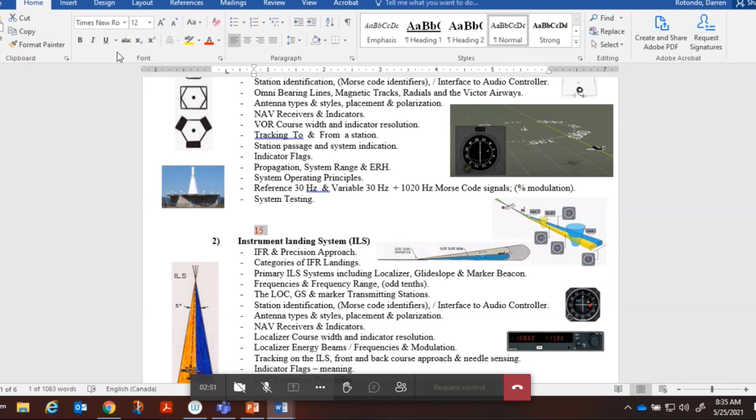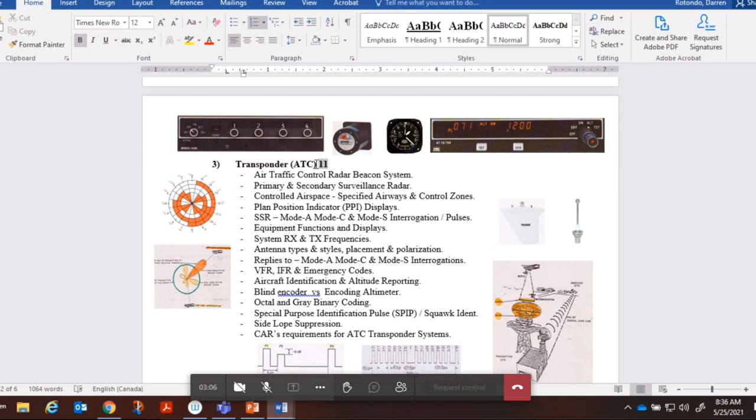Okay, moving to part 2, instrument landing system. You're going to see 15 questions on the instrument landing system. For part 3, transponder, we're going to put 11 questions on transponder. And DME, also 11 questions on DME.

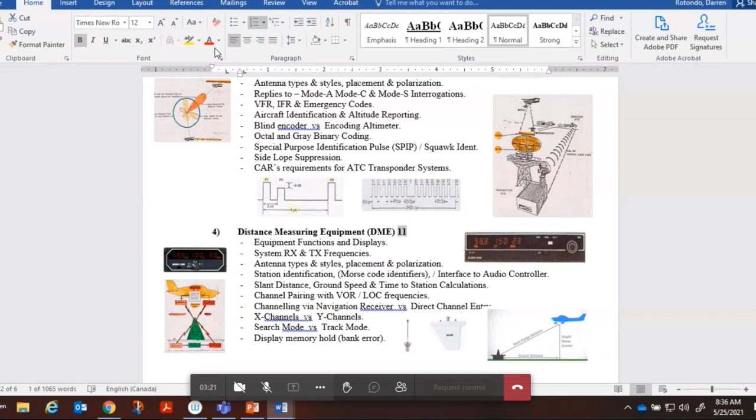And TCAS, there's going to be 7 questions on TCAS. GPS, 3 questions on GPS. RADALT, 7 questions on radar altimeter. Autopilot and automatic flight control systems, that also includes flight management systems, flight directors. There's going to be 16 questions on that topic.

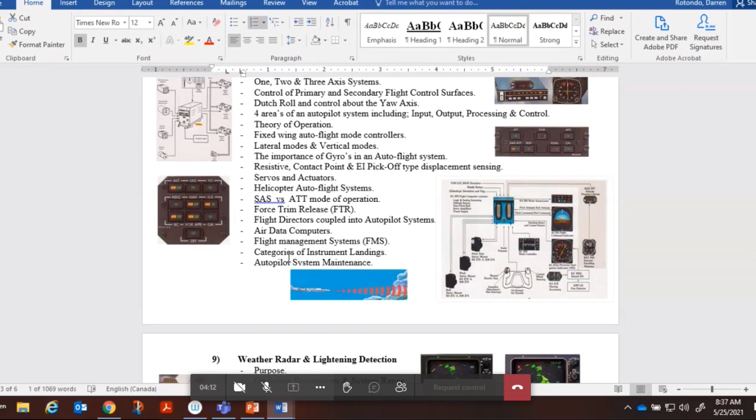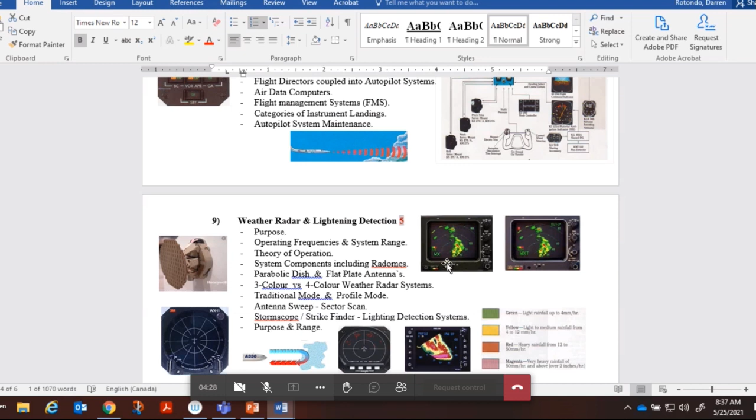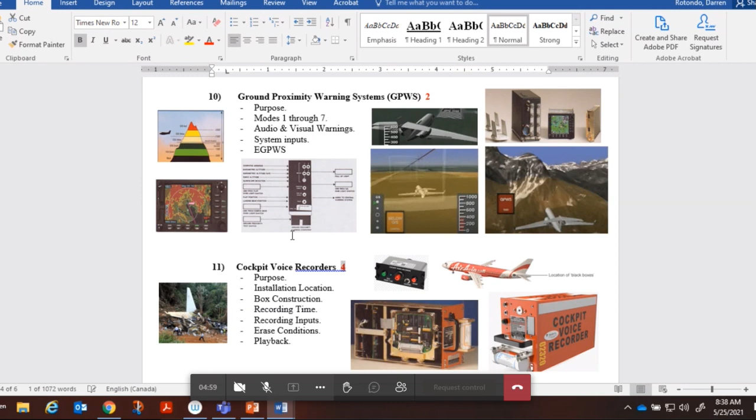Weather radar, there's going to be 5 questions on weather radar, which also includes lightning detection, so Stormscope, Strikefinder, and ground proximity warning system. There's going to be 2 questions on that. And cockpit voice recorders, 4 questions. Flight data recorders, 2 questions.

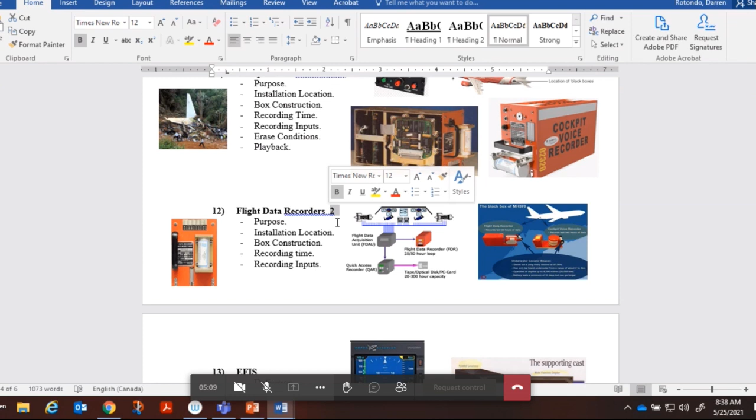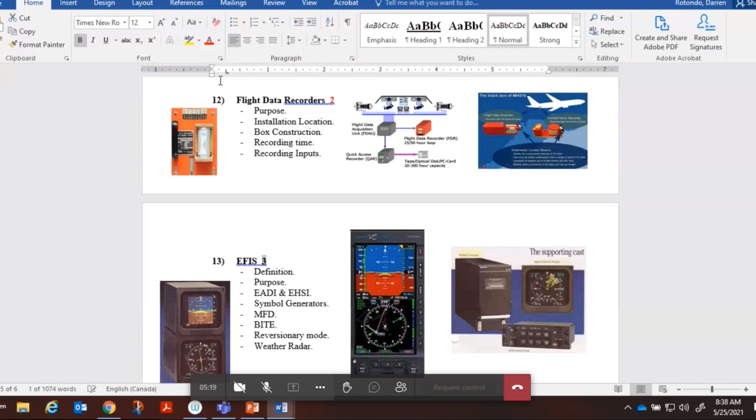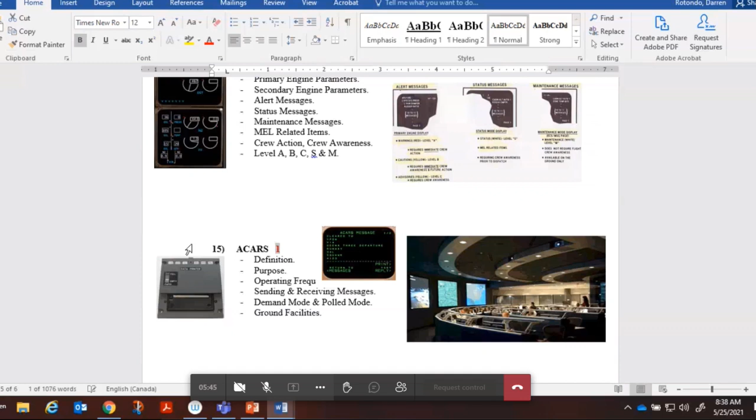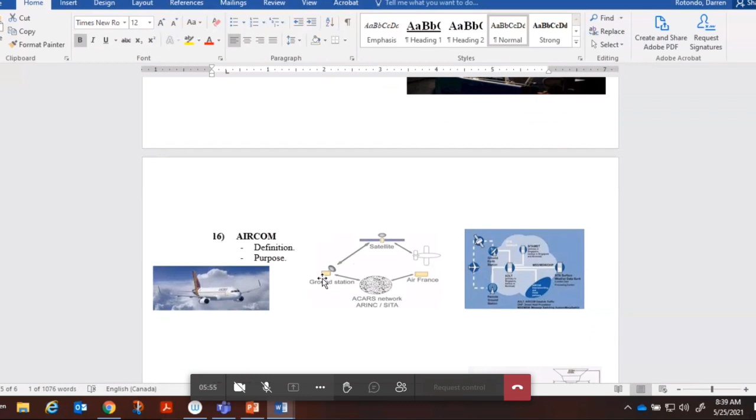Electronic flight instrumentation systems, or EFIS, 3 questions on those. And 1 for good luck on ECAM and EICAS. Then ACARS, a question on ACARS as well. The ACARS question covers AIRCOM. It's the same system, one's European. Selective calling, SELCAL. We'll add a question on SELCAL. And a question on satellite communication right there.

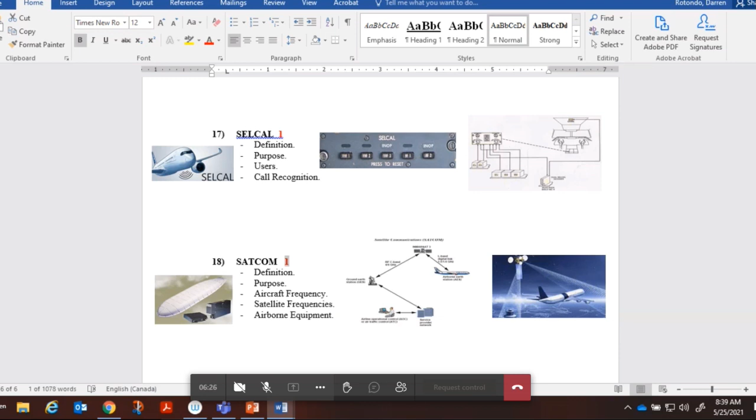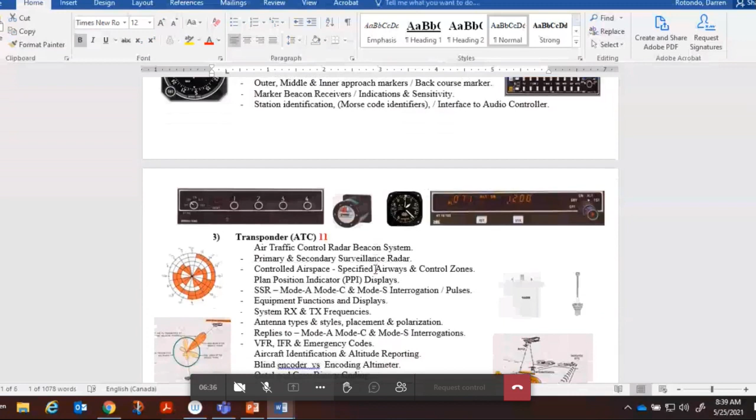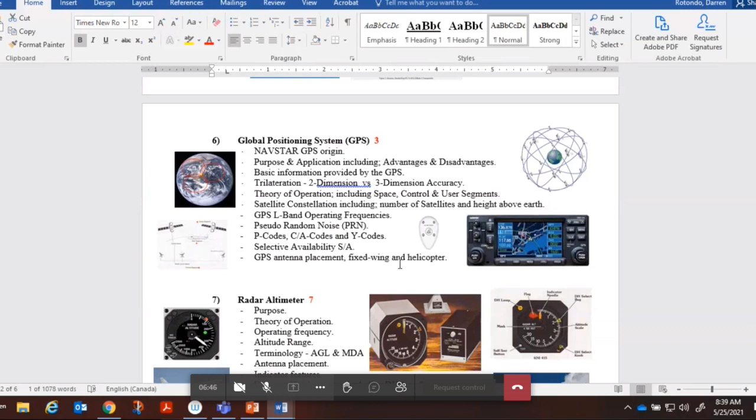So the grand tally, if you add everything up, you're looking at 100 multiple guess questions for your learning enjoyment. Okay, so just to recap, let's go back to the beginning for those people just coming in the door. VOR, 10 questions. ILS, 15 questions. Transponder, 11 questions. DME, also 11 questions. TCAS, 7 questions. GPS, 3 questions. Radar altimeter, 7 questions. Autopilot, which also includes automatic flight control systems, flight directors, and flight management, 16 questions.

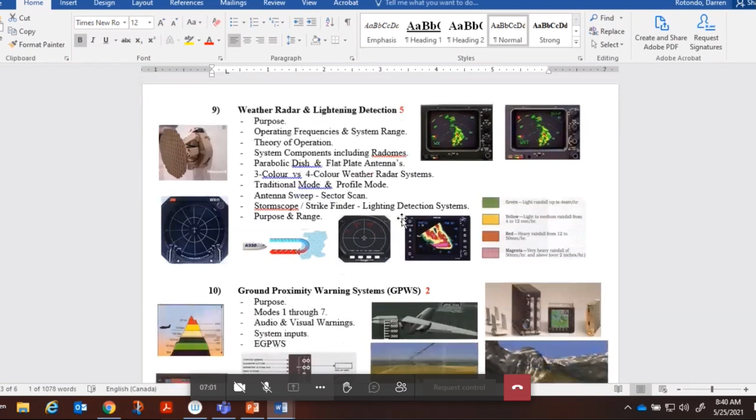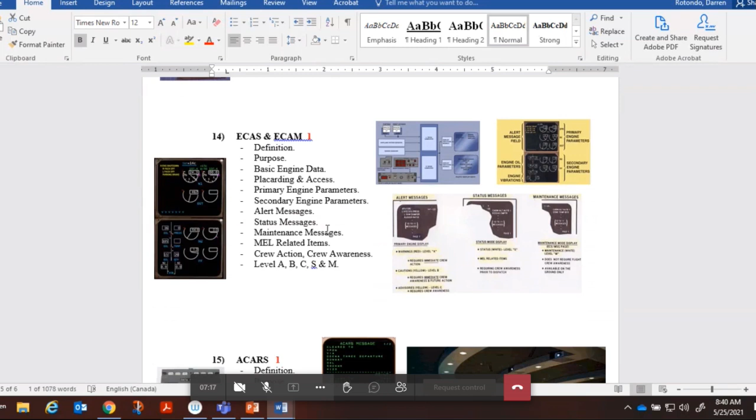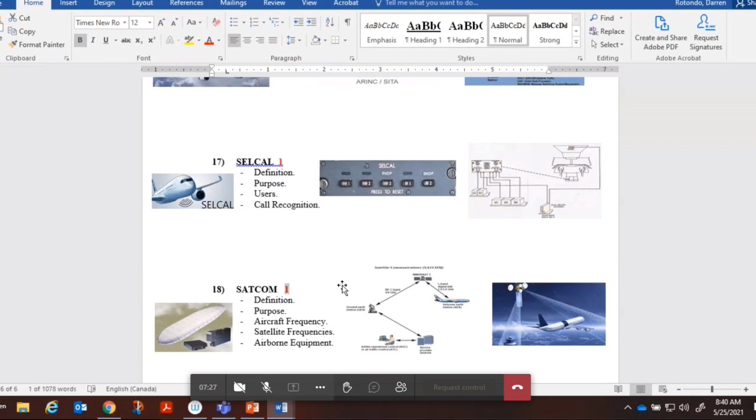Weather radar, including lightning detection, 5 questions. Ground proximity warning systems, 2 questions. Cockpit voice recorders, 4 questions. Flight data recorders, 2 questions. EFIS, electronic flight instrumentation systems, 3 questions. EICAS and ECAM, 1 question. ACARS, which also covers AIRCOM, 1 question. Selective calling, SELCAL, 1 question. Satellite communication, SATCOM, 1 question. 100 questions total. Okay.

Okay, that's great. Okay, moving right along. I want to see.

Okay, so let's get started. Do a little bit of a review here. A little bit of a review. Okay. So, Section 1. Anyone from Section 1. You should be able to tell me in this radio stack what the top unit is. Let's start with Alexander in Section 1. What is that?

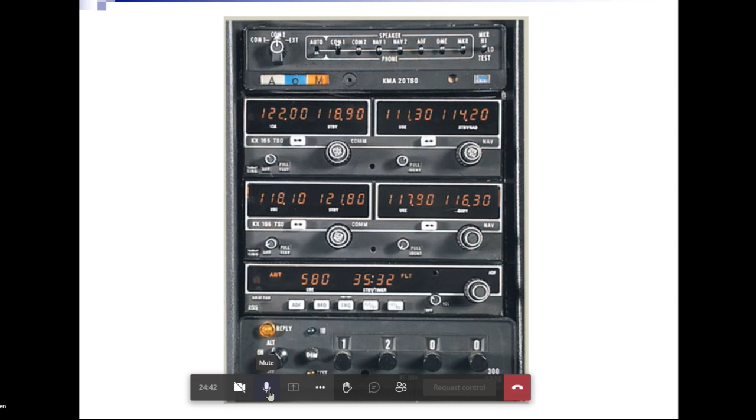Okay, who's Bryce? Where's Bryce Cameron? Is he around? Yeah, I'm here. Yeah, what do you got there? What's that last unit? Oh, I'm here with Alex. I'm not exactly sure. You're what? You're at church. That's cool. No. Charlie, clearly, help him out. Let's see. Let's let them see clearly now.

The rain is falling. The transponder. That's transponder. How'd you know it was transponder? Lucky guess. No, it's more than a lucky guess. Hey, what mode is it in? What mode is that transponder in? Look at the mode selector. Altitude mode. So in altitude mode, what does it deliver to air traffic control? Just altitude?

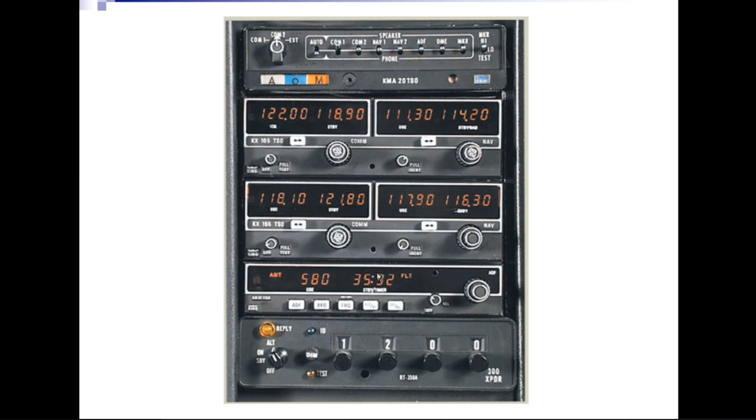Yeah, when they tell you to squawk a number and then hit the ident, that ident will illuminate for a minimum of how many seconds? 20. And it'll make a proof positive ID on their plan position indicator scope that you are who they think you are. So that's good. Nothing more there. Switch to the next one.

So what are we looking at here? Section 6. Andrew Ewing. What is this thing? What is this setup? Nice presentation too. Look, it's got the first frequency of whatever this thing is and the last frequency of whatever it is. Okay. Andrew Hannes. What is that? No? Dean Cove.

Nav receiver. That's the which? Nav receiver? Yeah, I like it. Good. It's definitely a nav receiver. There's the word nav. First frequency 108.00. Last frequency 117.95, 50 kilohertz channel spacing, 200 channels, 160 VOR, 40 ILS localizer, and life is good.

So when it comes to VOR, the V stands for the frequency range on which it operates, so it's very high frequency. The O is omnidirectional. The R is range. And VOR was made available to the civilian market at the end of the Second World War, 1945. And why did it quickly become the preferred navigational source over ADF? What was the problem with ADF? Because ADF wasn't necessarily that bad.

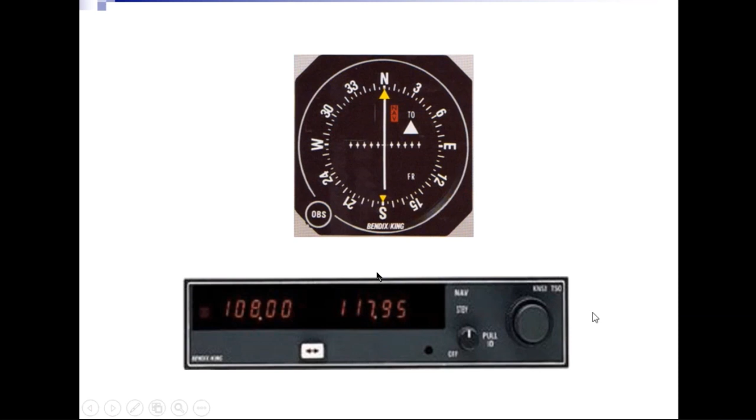Right now, the active frequency is the first frequency, 108. The standby frequency is 117.95. The volume is about halfway up. If I wanted to hear anything, I'd have to select nav through the audio controller. And if I wanted to hear the Morse code, it says pull for ident. I'd have to pull and break the squelch so I could hear it.

Okay, looking at what we have there, we have three symbols. Which one of those is actually a VOR symbol? Is it the top one, the middle one, or the bottom one? Top one. Top one is a VOR symbol. Okay, so what's that make the middle one? And that's what North Bay actually has. Middle one. VOR DME, isn't it? Yeah, so it's a VOR station co-located with a DME station. It's kind of like a Wendy's and Tim Hortons co-located to each other, or Harvey's Swiss Chalet.

And what's the last scary looking one? VORTAC. Yeah, VORTAC. What's the TAC mean? Tactical. TACAN, Tactical Air Navigation, the military gave us all this stuff. So a VORTAC is a civilian VOR station co-located with a military TACAN station. It doesn't matter. Any of those stations, whether it's just VOR, VOR DME, VORTAC, or even TACAN, you can pick up usable VOR signals from any of those stations.

How are VOR stations identified? I think I talked about this. North Bay is YYB, emanating from the station on 1020 hertz audio. And the range of this system is, now you've got to get nice and high. The higher you go, because it is a VHF system, the better off you're going to be. If you're nice and high, let's say 30,000 feet, you're going to get about 200 nautical miles out of this system. So you can track towards or away from an en route VOR station or towards an airport. Okay.

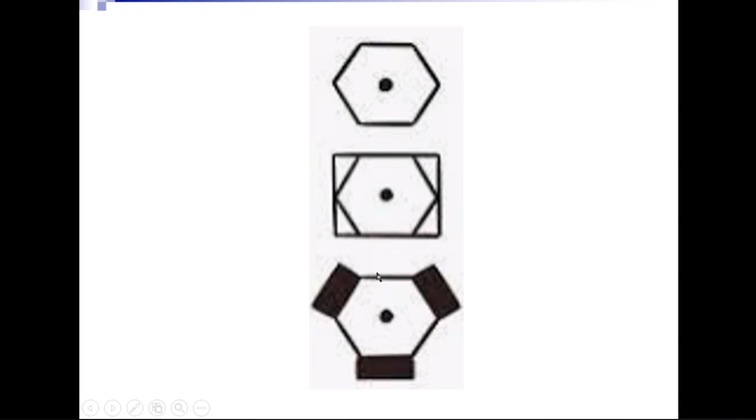Ooh, okay. I'm looking at this. What is this a depiction of? Is this VOR or is this something else? What do you think? ILS. I think it's the ILS. I think what that's trying to show me is the three parts of the instrument landing system. What are the three parts of an instrument landing system, starting in order of acquisition? And when I say acquisition, what do you pick up first when you're flying towards the instrument landing system?

Localizer. So as far as 25 nautical miles out, you can start to pick up the localizer, which provides lateral guidance. Lateral guidance to what? The station. Okay, but what's it trying to do for you? A needle that's moving left to right, what's it trying to do? Yeah, it's trying to line you up with the center line of the runway. So as far as 25 nautical miles out, you can start to center up your vertical needle.

Remember, your vertical needle is the same nav indicator you've been using for VOR, but it's no longer the same game because you've changed the frequency on your nav receiver. The VOR frequency got you to North Bay, but the ILS frequency is going to land you. So it's the same nav receiver, same indicator, but the vertical needle now has nothing to do with a radial and you selecting a radial, and everything to do with the center line of the runway and getting you on it and keeping you on it.

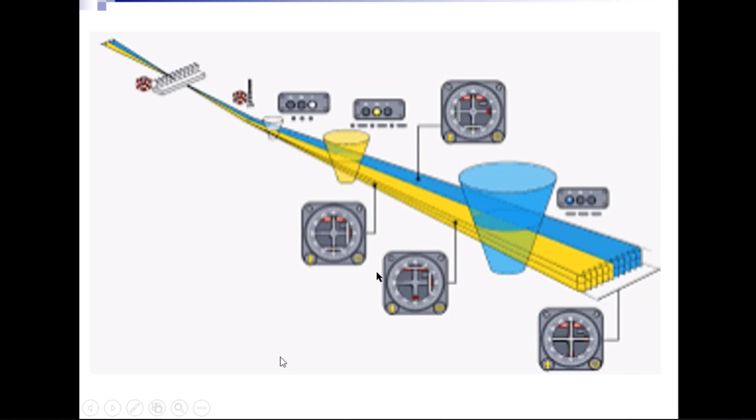So there it is in all its glory. Whether your marker beacon unit is a separate unit outside of your audio controller or part of it, which is a pretty good idea considering there is marker audio, is neither here nor there. But officially, you've got the outer marker first, OM or O, middle marker, M or MM. The inner marker, you can say I, A for airways marker, or FM for fan marker or zone marker. It's all the same when it comes to the inner marker. Doesn't matter anyway, it's turned off.

Any questions on that right there? Good.

So what's this do? We use this piece of test equipment. What's it test? Hopefully it tested what we just went through. I'm pretty sure this particular piece of test equipment tests localizer, glide slope, and if I'm not badly mistaken, you can check COM. So this piece of test equipment, which we did use, checks COM and it checks nav. Nav includes VOR and ILS. That's a COM nav test set. It's the IFR 401L.

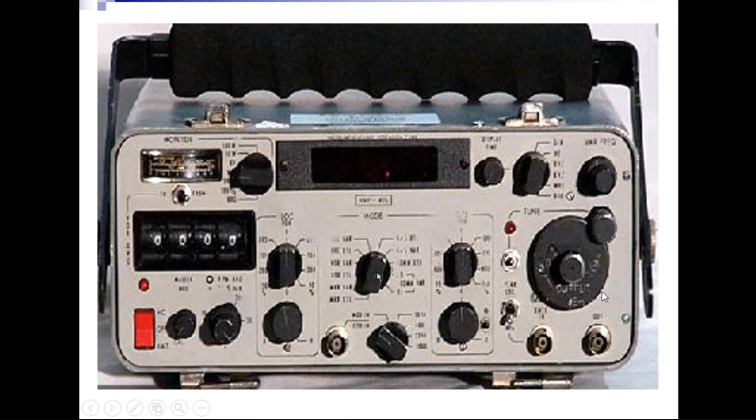Your transponder, is it a receiver, transceiver, or a transmitter? Your transponder in the aircraft. It's a transceiver. Does it is it a simplex transceiver or a duplex transceiver? Meaning, does it receive on the same frequency as it transmits on, or does it receive on different frequencies than it transmits? It's a duplex. Yeah, two different ones.

So your transponder actually receives interrogations on 1030 megahertz, coming from air traffic control, and it replies back on 1090 megahertz. It's digital, it's pulse.

When it comes to this ground facility, this air traffic control radar beacon system, it's not the primary surveillance radar that's initiating the interrogations. It's the secondary surveillance radar antenna system riding on top of the primary. That talks to all transponder-equipped aircraft in range. And when it comes to range, start thinking of all these systems as a range of about 200 nautical miles out, depending on altitude.

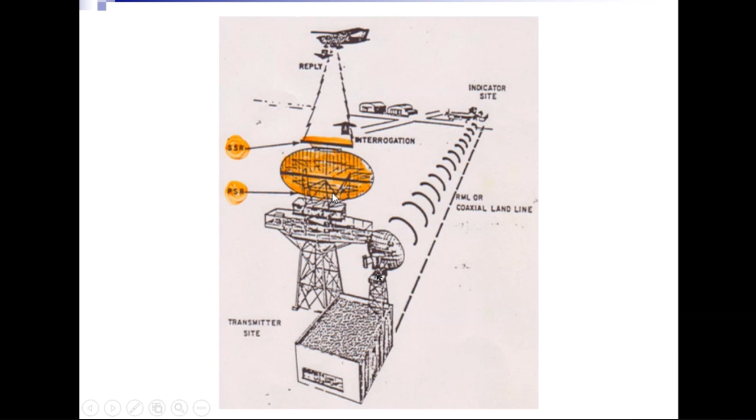The primary surveillance radar is to capture objects, aircraft, other objects that aren't sending any kind of data. It's to see it all on a single screen at air traffic control, a plan position indicator screen. So whether you're transponder equipped or not, we want to see everything on those sites.

So I'm looking at this here. I already said the range is about 200 nautical miles out. When it comes to the game of transponder, who is the interrogator and who is the replier in the game? There's only two parties involved. It's either the aircraft or the ground station. So who's the interrogator?

Ground station. Yep, ground station. Air traffic control interrogates. The aircraft responds. Hence, transponder replies.

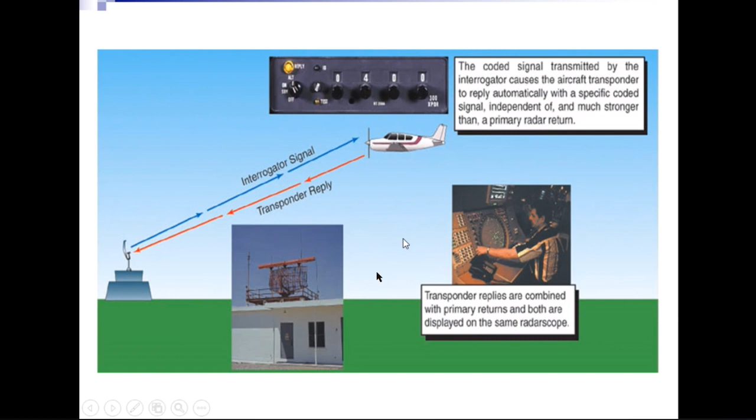Air traffic control always interrogates mode A followed by mode C followed by a mode S interrogation. So if your aircraft is only in the on position, it'll only send back answers to mode A interrogation questions. However, if it's in the alt position, it'll also send back pressure altitude reporting. And if you have a mode S transponder, it'll send back all of that stuff plus more as part of a mode S answer.